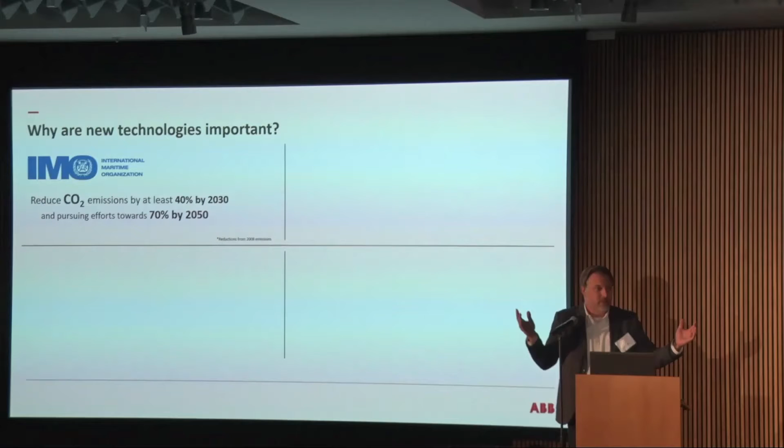But number 2 gets into this. Why do we need new technologies? Number one, everybody knows this. We've talked about it already and what the IMO goals are. Number 2, zero emission ports. 2035 Long Beach, Port of LA, Port of Vancouver. It's very West Coast swung, but it's starting to move its way across the U.S. Even the petrochemical heart of the U.S., Houston, saying 70% carbon reduction by 2040. So that's huge. The areas that we're operating in are really putting those pressures on us.

And that applies to cold ironing, idling in the fleet, standby at the dock. The new CARB rule, if I heard it correctly yesterday, for a tug operator, if you're going to sit more than 15 minutes operating on a generator, you have to plug into shore power now, where normally they just hang out at the dock running a genset. So pretty big implications just from the port side.

Feel great that I actually did put BP up here since I was on the panel with BP. But this one, I don't even have to put names to. Everybody knows the goals of the oil majors, their net zero carbon goals. And a lot of it comes down to their supply chain and who they're using for horsepower. So for instance, a lot of Austin's customers are being pushed for this because they operate for these companies.

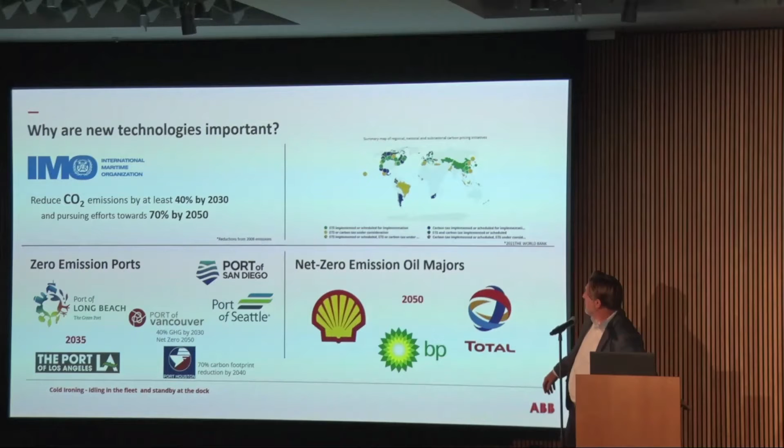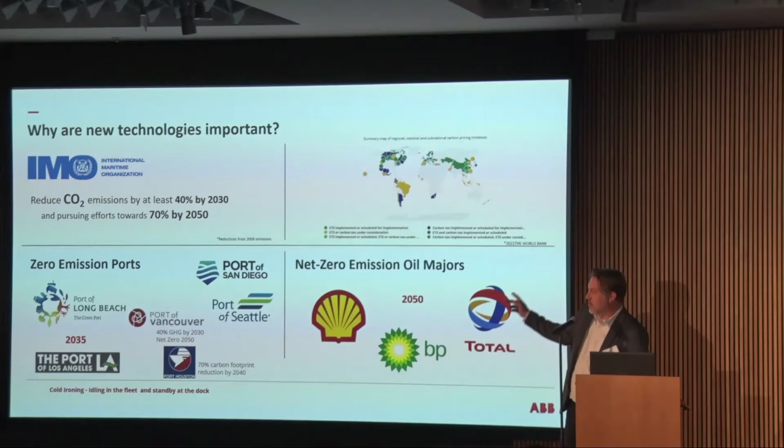And the next one is really hard to see, but if you just Google carbon tax map, this is the World Bank from 2021, it shows where there's currently either carbon tax or it's in legislature somehow. Again, no surprise you see the West Coast of the United States and how it's starting to be adopted here. So with the scrubber barges, you could do an internal combustion engine that has emissions. However, if you emit carbon in one of these areas, and it's going to get larger, you'll have to pay a tax on that. So that's really why I'm here, because people are looking at what technologies can get them through all these pressures.

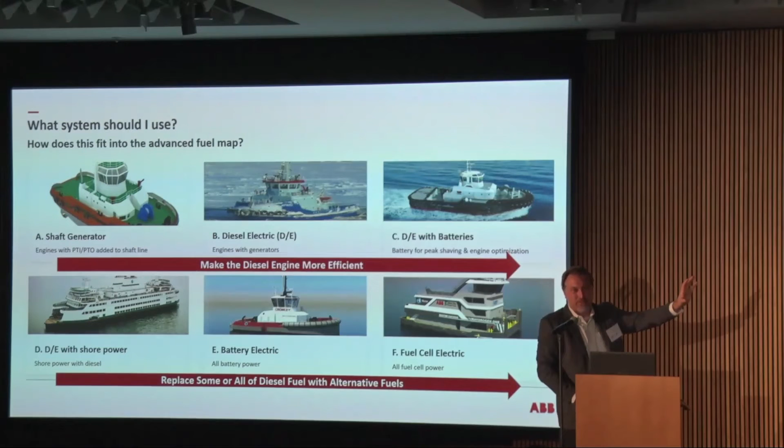And I'm an old mechanical engineer. One of the things I like is those really cool, sexy gearboxes and engines and those types of things. But when it comes to electrical equipment, it's a bunch of lights on the front. Cool looking, but what really makes them work is all the automation stuff behind it, which is much more difficult than actually doing what's inside that box itself.

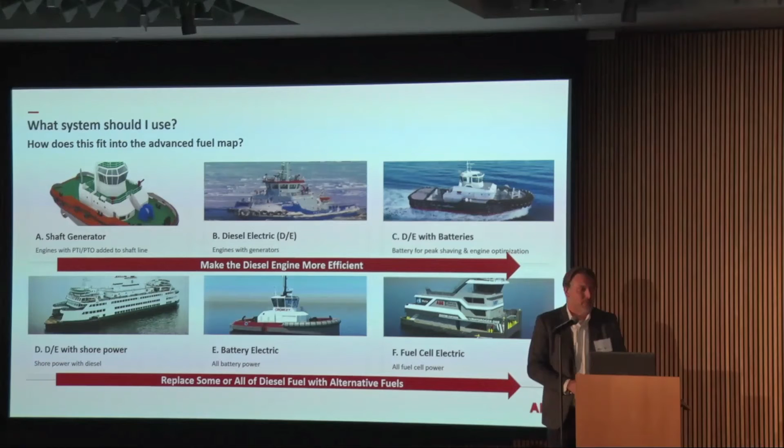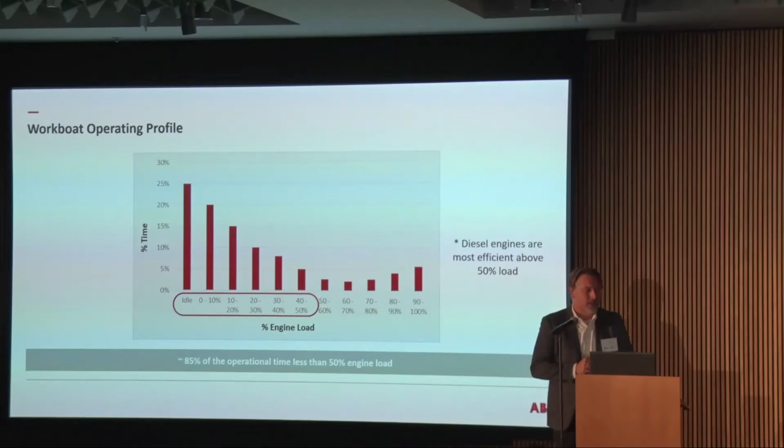It's absolutely ridiculous. And what makes it even more ridiculous is, like I put in the stars section here, the diesel engine is most efficient above 50% load. We're hardly ever there. So you're so inefficient in what you're doing. And oh, by the way, in a standard inland boat or a tug, you have both main engines and a genset running this entire time to cover this.

For Hydrogen One, what we're looking at is a lot of the times we may be just running 2 reformers and 2 fuel cells, and the other ones are just sitting idle. We're going to use the power that we need versus having everything online running very inefficiently.

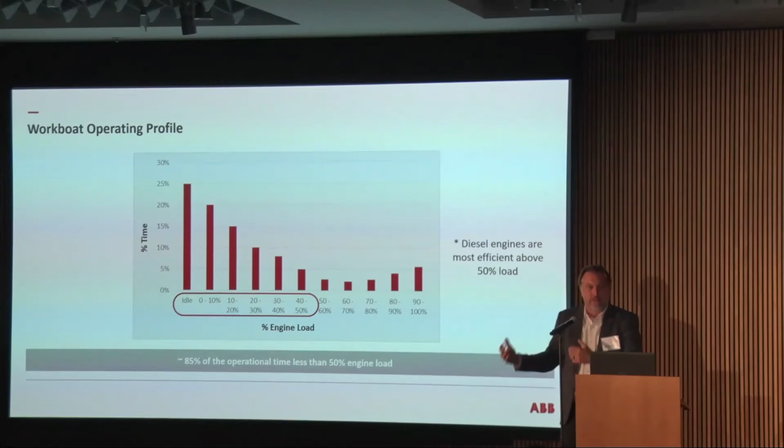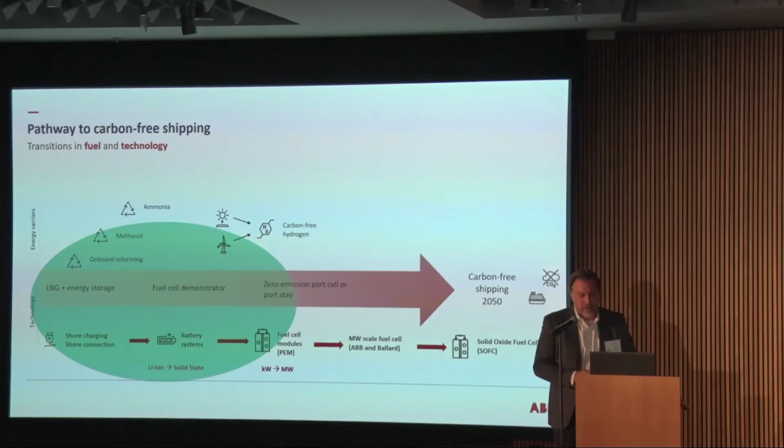So let's go forward and look at how ABB looks at the pathway to carbon-free shipping. There's a lot of things on the screen here. I'm not going to walk through every one of them, but it really kind of shows the energy carriers at the top, the technology at the bottom, and kind of where we're at today is here in the green. We're trying to get to things like carbon-free hydrogen. We spoke of it earlier, whether that's through solar or wind.

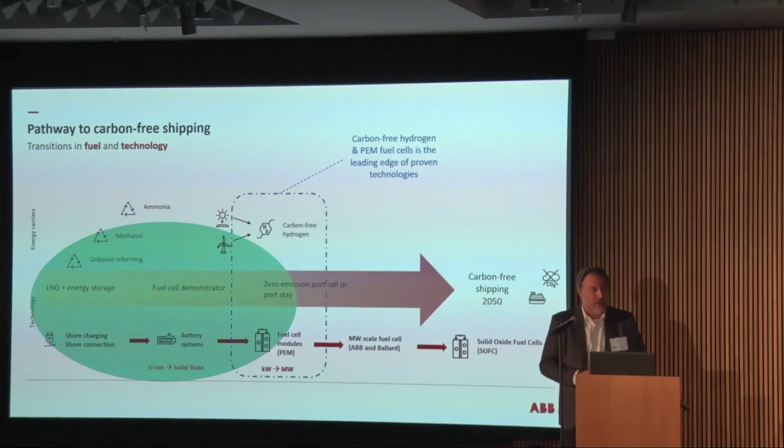But the most important thing here is carbon-free hydrogen PEM fuel cells are really kind of leading that right now in a lot of the segments that I look at. Fuel cells have been around forever. I will still reiterate this. As we look at the bottom side here, we're still looking at getting from the kilowatt scale to the megawatt scale in a single reformer, a single fuel cell, those types of things. But again, that's rapidly developing.

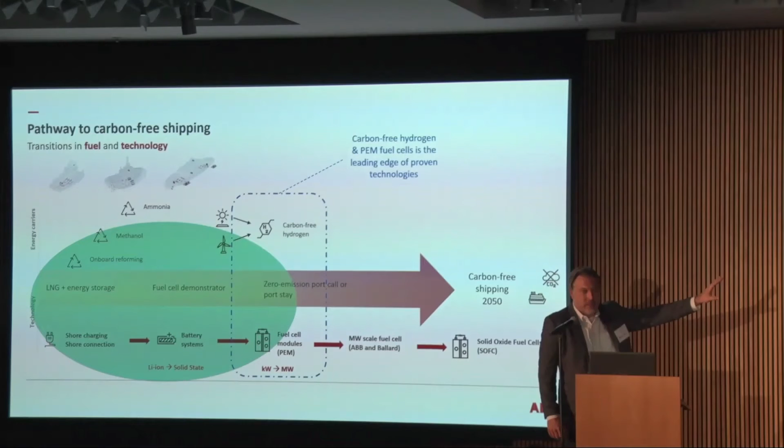And then I always like to show kind of where each one of the industries are. What's really interesting, I'm an old brown water guy, old towboat guy. I thought already in my 4 years at ABB, I probably would have just sold a diesel electric or PTO, PTI towboat. This map, because of Hydrogen One, kind of needs to be leaped. We're already to a reformer boat compared to a diesel electric or PTO, PTI. So probably need to change that for next time, but that's currently where we stand.

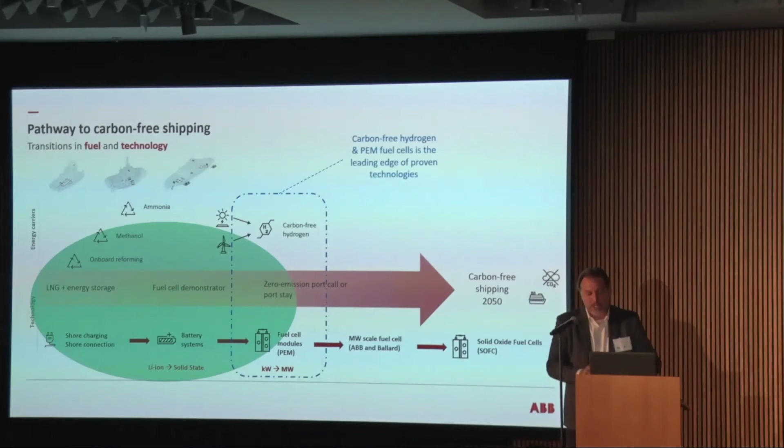Hydrogen One, I don't know of really any moving parts you're going to see. If you go back to the thrusters, because they are L-drive thrusters, there's no shaft lines, any of those types of things. You probably look in between where the adapter is, and you'll see a shaft rotating. A couple of the pumps, you may be able to see the shaft rotating on those. Other than that, there are no real moving mechanical parts in this system.

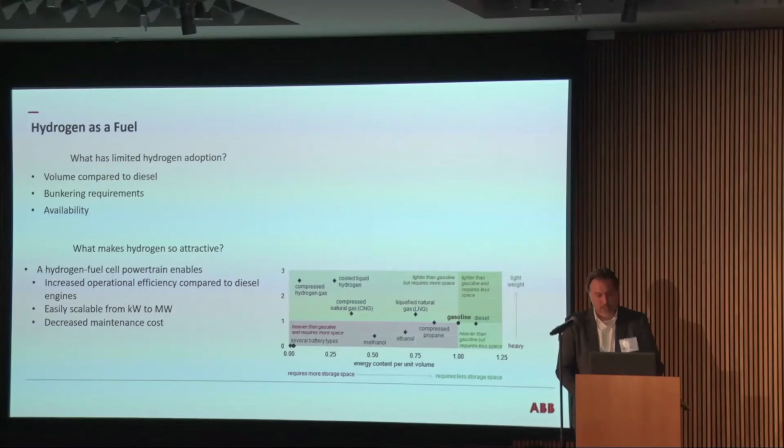So really what we look at, again, is hydrogen has all these benefits, but it has all these roadblocks as well. That's why we looked at methanol, and it's ready today. You can really convert that methanol to hydrogen at the point of use versus having a big hydrogen tank either on the vessel or on the shore. And what I like to show on the bottom here is just the chart. Everybody knows that methanol energy content is not as great as gasoline, but you can see where it's on the chart compared to a lot of the other ones that are out there. And then again, green methanol has potential for enhanced emission savings. We're not that far off.

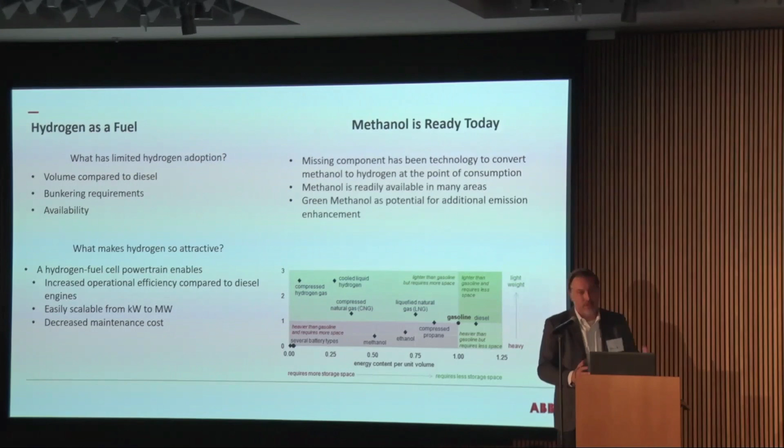And the other thing that we look at when we look at this system, you will get some increased efficiency because, again, like I said a minute ago, you're only going to run the reformers and the fuel cells that you need in their optimal range. So when you compare that to the traditional diesel system, the overall system efficiency is increased.

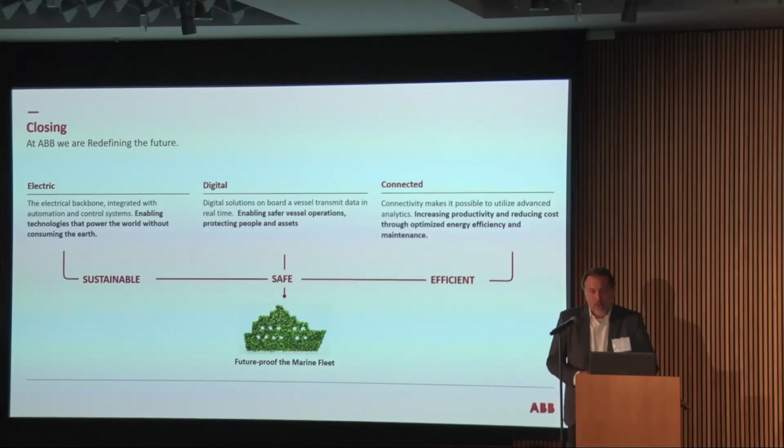So in closing, and I'm going to get out of here right after this, I promise. But one of the things that I really like in the way that ABB looks at future-proofing the marine fleet is really the first one. We are here to enable technologies that power the world without consuming the earth. We've consumed the earth for way too long. We've been doing the wrong things for way too long, and we need to change the way of thinking, and that's what we're here for.